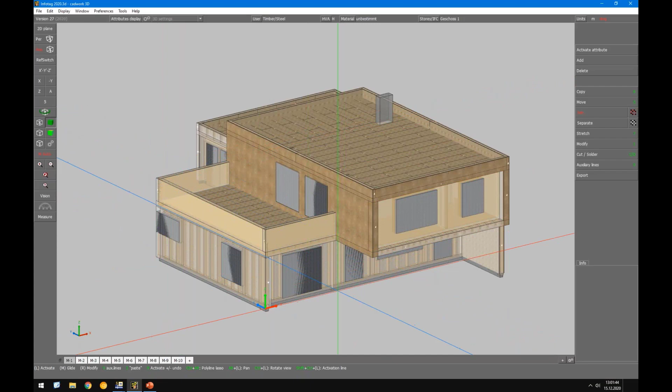Okay, let's not waste time. We start directly in cadwork, and we see the model there. Let's have a look underneath the rendering, and we will see how it was solved. So you can see here the CLT slab, and here on the left side, of this problem.

Okay, I got some issue with my monitor. So we have beams and dowel type connections. We get one component here in the vertical direction via this column, and one component goes in the upper chord to the next tension beam and downwards. So I'm interested only in...

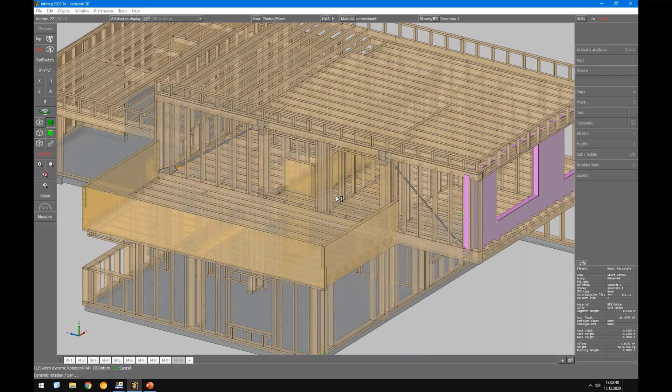I have some issues with my monitor. Wait a minute, please. Andreas, could you confirm, please, if you see still my screen? I can see your CADWorks screen. Yeah, okay, perfect. I switched over to the second monitor. There was an issue. Let's see if it works fine. I'm sorry.

The aim now is RFEM, and we can use it by exporting, for example, an IFC file, or we can export a DXF file. But there's one smarter solution.

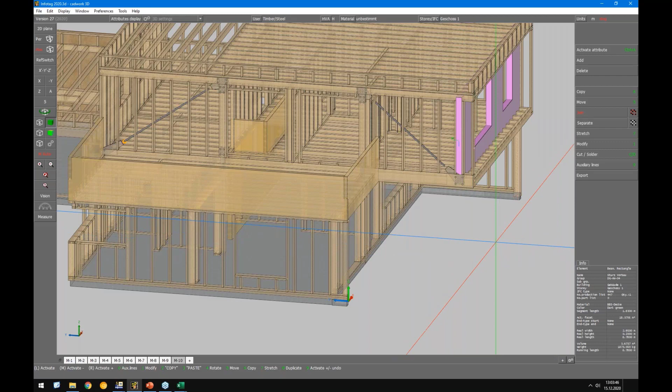In this case, I will have a look only at this element here, and I'm interested in the center lines actually, because this is a solid element, and of course I want to design it with a surface element and not with a solid element. So therefore we need the center lines.

Here in this case I can use a variant from CADWork, I was not able to rename it, but it's called center surface for CLT. Okay, so I use it and select the element. Then let's go to the wireframe mode, and you can see here the center line or the center surface. This is actually the one and only element I'm interested in.

So I have the possibility now to export it as a file. In this case, I use the ACIS export format. Wait a minute, I need to, of course, select all of them. All right, I save it. Let's export.

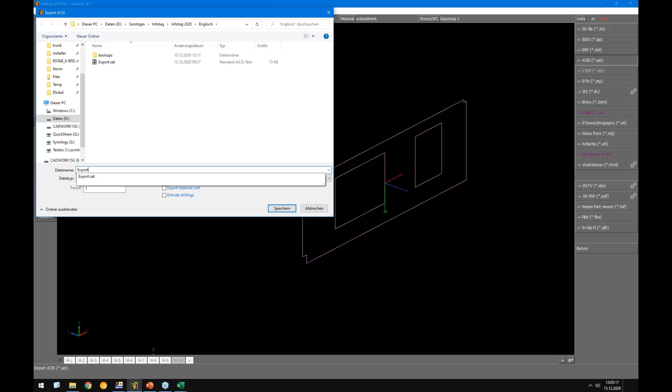And now I switch over to RFEM. Here I'm able to import this SAT file. I select the Eurocode 0 plus for the SLS combinations, EN1990 plus EN1995, and we leave the global Eurocode.

Of course, you're able to select any other national annexes. Okay, we want to create load combinations automatically. I select it and click OK.

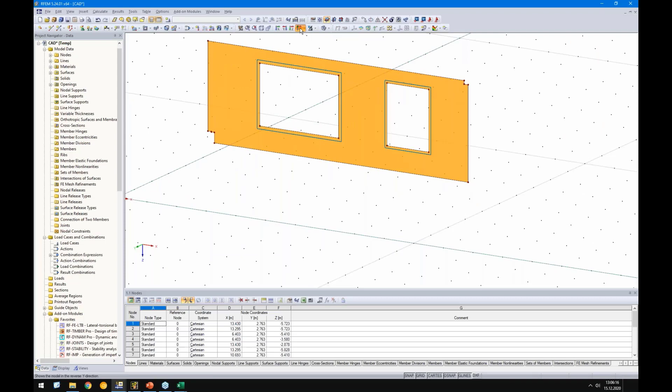All right, then let's see what we have here. So you see the wall was overtaken from CADWork with the openings, and there is a material assigned. Okay, it's a softwood material, but it's not important for now. We will come to this later.

We want to clean up the model a bit. So, for example, I want to ignore this notch here on the upper right side. I will move this node to get a sharp corner.

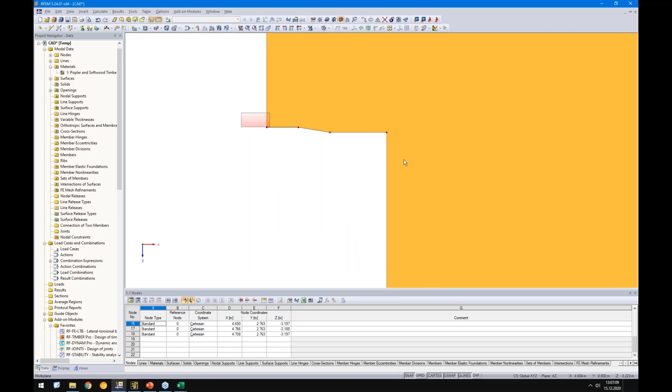Perfect, and I will do the same here. We have this tiny step, or this tiny jump, I want to neglect it, of course. So I grab the coordinate of this node and assign this coordinate to all other nodes. At the end, I will merge these nodes, and the same on the left side.

Right side, I mean. All right, so now we can start actually by adding the loads, supports, and so on. But before we do this, let's think about what needs to be checked and what is important. You see here the rendering of this surface, and it's clear when there should be a support and on the right side should be a support that the outer layers should be orientated in horizontal direction. That's one important thing, that we need to take care of the orthotropic direction.

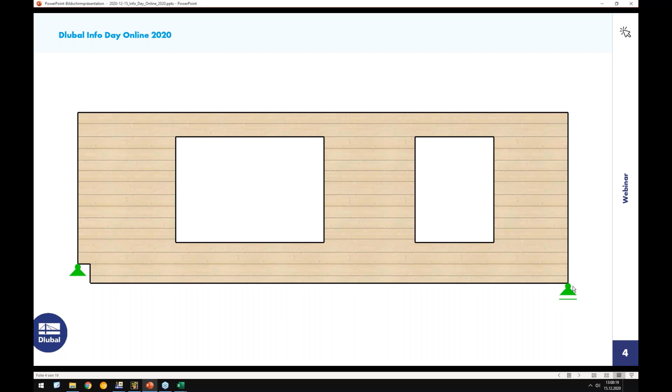So the outer layers should be horizontal, and every second intermediate layer should be orientated vertical. Okay, so the next thing is, of course, we need to take care about the supports. In this case, just for demonstration reasons, it's a nodal support. We will not use it afterwards in our design, but for the slide, it is okay.

Okay, we need to take care of the FE mesh. So what size should be used or is suitable? We talk about the stiffness of this CLT element, especially when we check this section here. This one here is a section through the wall. We see here we have the horizontal layers, and we have the transversal layers, which are orientated 90 degrees to the horizontal layers.

And you see it here, this white area. This should be the space between this board and this board, because we do not use any glue at the narrow sides of the boards. So this, of course, has influence on the stiffness, and we need to consider this correctly.

Okay, we have a tiny notch here on the bottom. Of course, it will not be controlling since this element is really high in ratio to this small notch. But you can imagine when you have a CLT element as a beam, and maybe you extend this line here, then you will see you have around 50% of the notch, and then it is much more controlling, and this fact needs to be checked. I'm just saying that you should consider it.

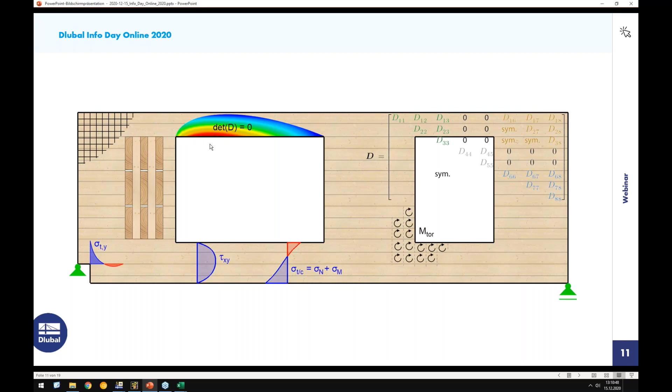Maybe buckling can occur. So in this case, we have roof beams and floor beams. But you can imagine when this acts as a one-span beam, the upper chord is under compression. So therefore, it can happen that the bottom side of this upper chord can buckle out somehow. This is something we will check.

And of course, the window must work also in the deformed shape, so it should not get any crack or get destroyed. So therefore, we need to check the deformations, especially the deformation inside here, and of course the global deformation. All right, that's so far for my presentation on the slide side. And now, let's start directly in RFEM.

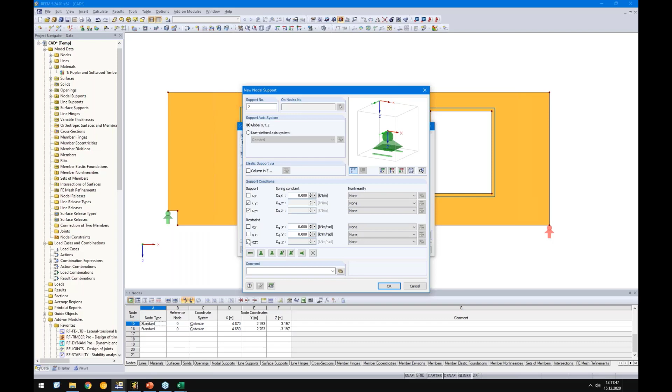So I will start really with nodal supports to see the effects. Okay, so I will support it on the left side. And of course, on the right side, I will use no degree of freedom in X direction. And of course, our wall is supported by the roof beams, the floor beams, and of course the walls. And in this case, I will directly add line supports.

So I support it only in Y direction, means out of plane. So here, here, here, and here. All right. So then, we can start with loading. So we create, first of all, load cases. Load case 1 should be self-weight, and we want to consider snow load. And of course, imposed load for the floor. Okay, you see here the load duration was assigned automatically, dependent on the action category.

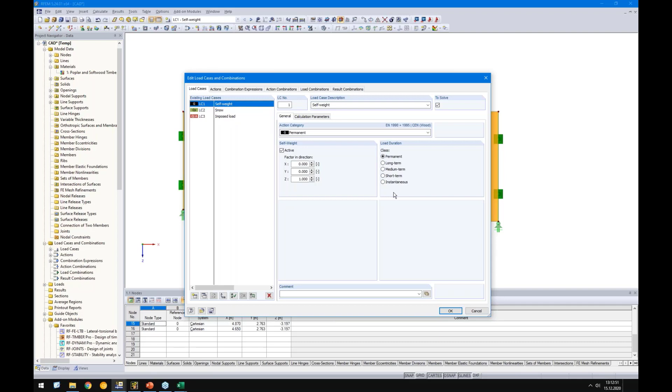And now we start to fill the load cases with loads. All right, so for the roof, we have a line load of 5 kilonewton per meter. And for the floor, it is the same, 5 kilonewton per meter. Then for the windows, of course, the window has a self-weight as well, which needs to be considered.

Which ways do we have to apply loads for openings? There is here under Tools, generate loads from area loads on openings. There is an option, but as you can see here, it distributes the load also to all boundary lines. And of course, this is maybe not the way I want to consider it now. I want to say that the whole window weight should act on these bottom lines here. So I use a normal line load here.

So when you consider we have a density of 25,000 newton per cubic meter, and the height of the window is 1.83, and let's say 3 layers with 5 millimeters is 0.015, that equals around 0.7 kilonewton per meter.

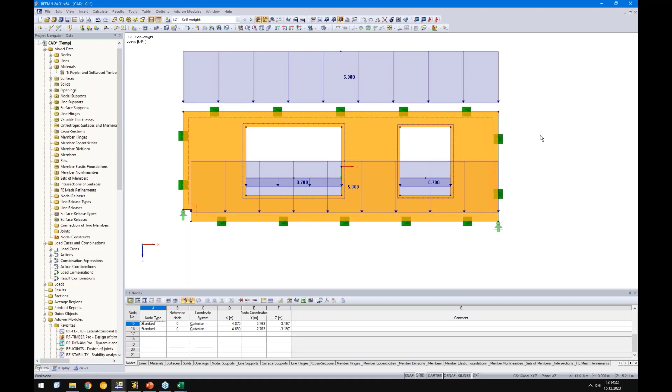Okay, and at the end, we need, of course, to consider the weight for the self weight of all components which will be fixed to the CLT element. And in this case, it acts on the whole surface, of course. So I use a surface load in this case. It should act in Z direction, and the load magnitude can be set here.

In this case, of course, I can calculate it manually and enter the value here, but you can imagine if you do this really often, you waste a lot of time. So better to use here our multi-layer composition. Inside here, I have prepared a few compositions for the wall structure. So in this case, I use this setting here. Let's have a look inside.

So there is an exterior plaster on the outside, wood fiber insulation. Then I have added the CLT. It should become 200 millimeter, and the density is 0 in this case because I consider the self weight of the CLT directly in my load case 1. So it's not necessary to add any value here, or you need to enter a value.

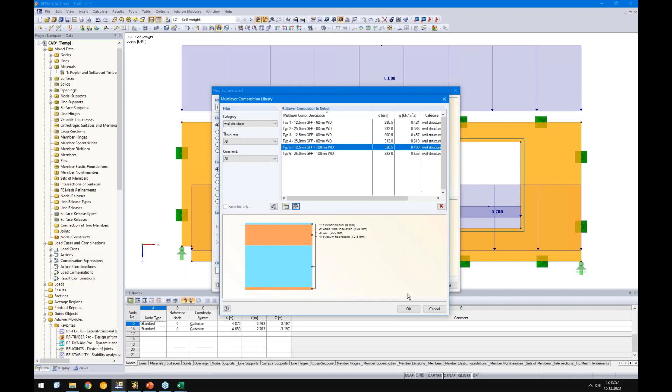0, I guess it's not allowed, but just enter a small value like 0.0001 to get it directly to the graphic here. Otherwise, you need to delete it, and then you don't have this proper drawing. All right, then let's overtake this value and click OK, and here we go.

So the next load case is snow load. So the snow load is 3.6 kilonewton per meter. And at the end, we have imposed load for the floor, and the floor beams are fixed on the bottom side of the bottom chord with 6.5 kilonewton per meter.

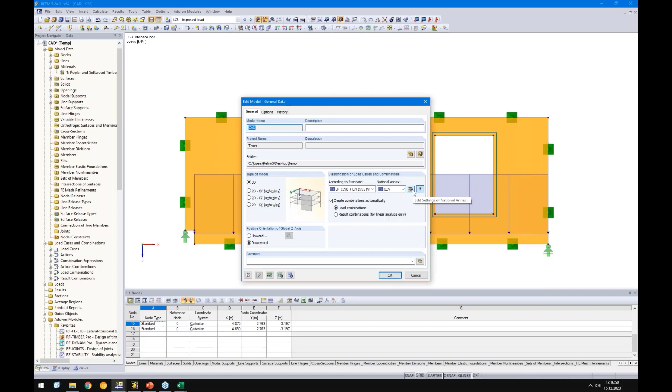All right, so far so good. We have finished loading, and we see directly the load combinations. Maybe you see here the 1.8. This considers the creeping effects. I forgot to switch this here, or to say you can switch the factor, the KDEF factor here at the properties of the national annex, and here on the bottom side you can switch, for example, to 0.6. So when you check it, you see the factor is considered in the load combinations for the quasi-permanent loading.

All right, so then actually we can start with the analysis, and before we do this, let's check our FE mesh. So I just create the FE mesh and see what is the result. And as you can see, okay, the FE mesh is absolutely bad and needs to be optimized. So you see here it's the default setting of 0.5 meters, what we use in the background. But what FE mesh size should I use in this case?

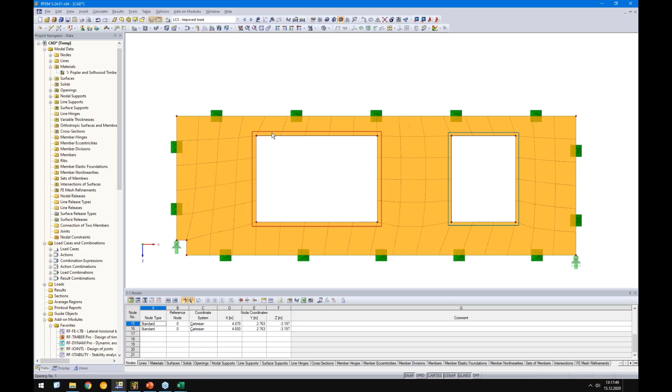So the weakest area is here, the upper chord, and I would say you should have at least 3 to 4 elements over the height here of the upper chord. And with the background that the producer does not put any glue on the narrow sides, and even if they put glue on the narrow sides, I do not recommend it as a rigid connection because of humidity effects and so on. So because of this, and we check this torsion design, what I mentioned in the presentation, the FE mesh size should be the same width as the board width.

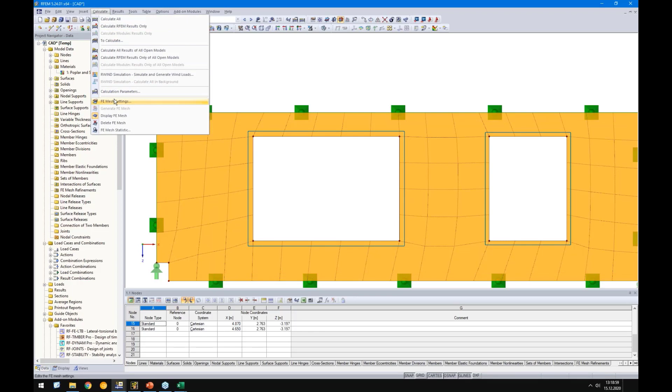So when you think about the ratio board width to board height around 4 to 1 or 3 to 1, then with the board thickness of 40 millimeters, what is used in this example, and use 3 to 1, we get 120 millimeter board width. So I will use here, let's start with 0.1 meters.

And regenerate FE mesh, and we will see, okay, we got 4 elements, we have these small triangle elements here and here. Yeah, for membrane forces, that's fine, but for bending, they could deliver some bad results. So maybe I will increase it a bit and see what's going on here. Yeah, 0.11. Yeah, looks good so far. So we use this mesh size for the analysis.

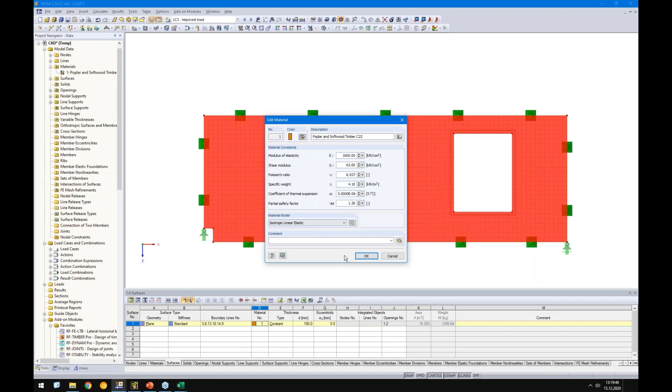Okay, then just try to run the analysis, and then you will see we get an error message because of Poisson ratio. And yeah, when we see this, this is just a poplar softwood timber with an isotropic linear material model. Of course, we can change it here to orthotropic elastic 2D, but in this case, that's something special with CLT, because for CLT, we have our add-on module called RF-LAMINATE.

Okay, and inside the RF-LAMINATE, we define the composition. And after we define the composition, before we run the analysis, the stiffness gets exported to RFEM, and then the internal forces are calculated based on the stiffness that we exported. Okay, I want to design surface number 1 according to Eurocode for CO1 through CO5.

So material characteristic, here we go with defining the composition. So we have to select the surface, it's surface 1, and here we can, for example, import compositions from different producers. Yeah, that's one way, and the common way actually, to not favor any producer, I created it manually. In this case, this is what you can do too.

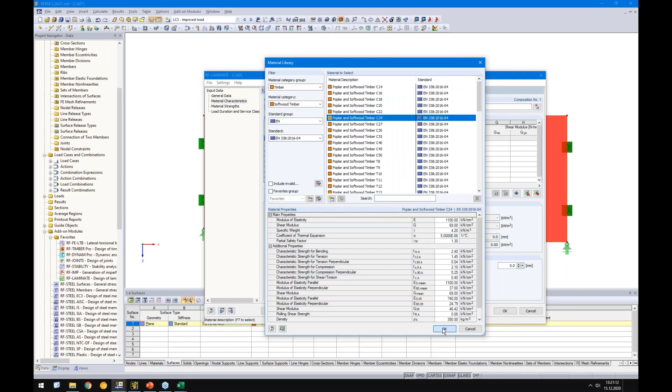So I'll load the material from our material library. So it's softwood, and I choose a C24 in this case, and you see here all settings are filled. And in this case, I select here cross-laminated timber. And let's see what's going on here. We have the thickness, 40 millimeter is fine in this example. The values for EX and EY are loaded, and for shear modulus and so on.

Here for the second layer, I hit the F8 button. It overtakes the entry from the first column. Okay, so in this case, the orthotropic direction is 0. So you see here this coordinate system. The red arrow is the x-axis, and the green one is the y-axis. So if I rotate the second layer, for example, you will see the red arrow goes downwards, and this is the transversal layer, so the second one. Okay, and the same for the fourth layer.

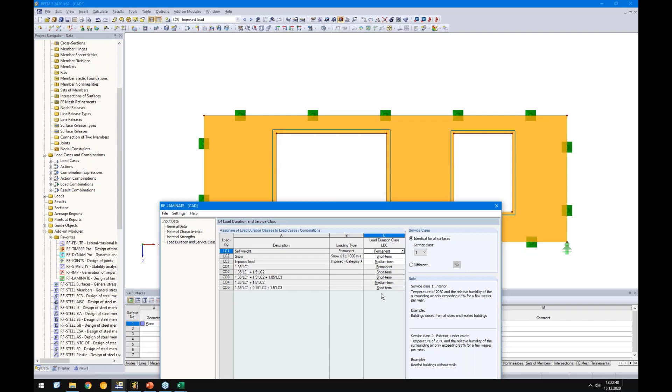Okay, then let's go to the next tab. It's the material strengths. And here we simply modify the shear strength a bit because we do not consider any k-crack for surface design, and therefore I will modify it a bit and set it for all layers. Okay, the last tab is about the load duration class, but it was assigned automatically to the load cases, and therefore we always use the shortest load duration as the code offers. Here are a few settings about the service class, but this is fine for us.

Okay, let's go back to the composition, and let's check the stiffness matrix. So we have the stiffness matrix elements for bending, for shear, and for membrane. And in this case, I do not consider any wind, since the wind was really weak in this example, and it is not controlling. It's much easier in this case to consider and envelope the results. So therefore, in our case, only the stiffness matrix elements for membrane, meaning D66 through D88, are necessary.

Okay, but the only problem we have now, we did not load it from the producer library. Therefore, we have a bit too much shear stiffness inside the plane, because how should the program know about the glue on the narrow sides? And this is what I want to show you about this issue. Okay.

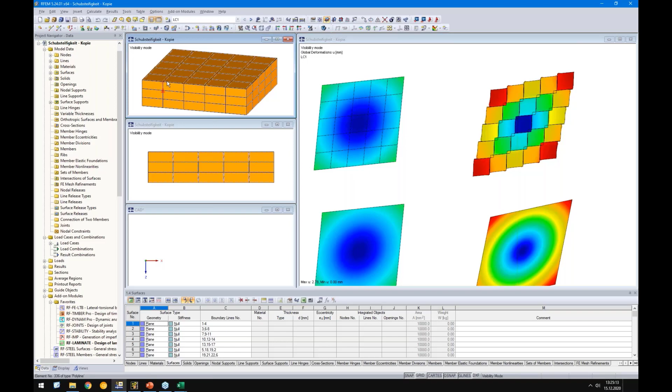All right, so here I have prepared a small example, and these are solid elements. In the upper one, I have glue on the narrow side, so it means there is a rigid connection between the solids. And on the bottom side, you see I have modeled a small gap in between each board from this direction, and also in the other direction here on the upper side. And here you see the results. So this is the result from the solid, and this is the result from the surface and RF-LAMINATE. You see the result is the same.

And of course, if there is no glue on the narrow sides, the deformation gets bigger, and this effect needs to be considered also here in RF-LAMINATE. And what you need to do is consider the ratio from this solid element to this surface or this solid element. And then you get a factor and you know how to reduce the stiffness. Of course, this is really time consuming, and nobody wants to do this.

Fortunately, there is an approach already, and it's based in the Austrian National Annex. So here you see this Excel sheet. You can download it afterwards on our homepage. You see here a small table, and you need to enter just the thickness of the slab, the amount of layers and the board width, and you get a reduction factor of 0.59.

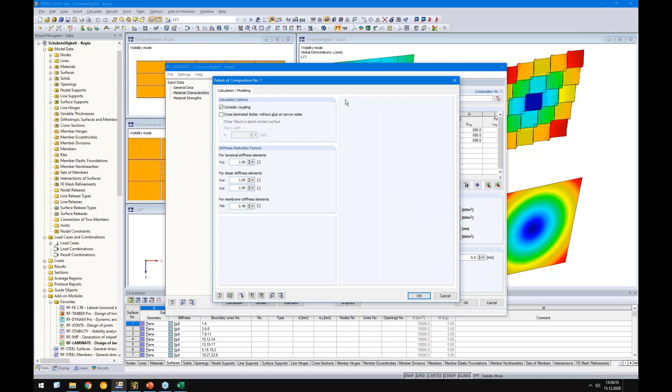And when you enter this value here in the details of the composition, as you can see here, you get exactly the same deformation as the solid elements have. So this needs to be done in case the producer does not provide us any values, but normally they do, and therefore you don't have to waste time on this. All right, so let's go back.

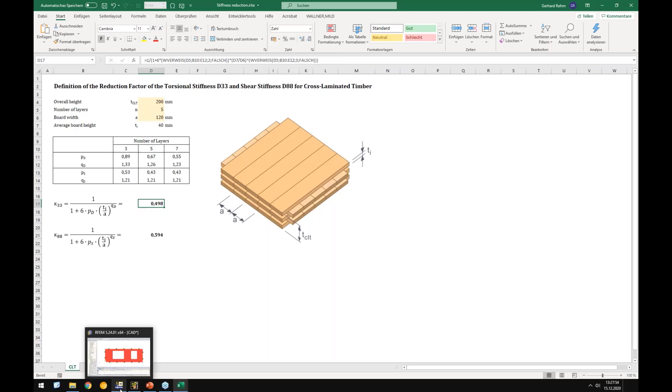And for our example, we need to figure out these factors. So I'll open the Excel sheet. So in this case, we had 200 millimeters, 5 layers, and 120 millimeter board width. So we have a reduction factor for the torsional stiffness, it's 0.5, and for the in-plane shear stiffness of 0.6. And these values we overtake now. So it's 0.5 and 0.6.

I use it also for the torsional element, since we do an eigenvalue analysis afterwards, and there the torsional stiffness is important too. Okay, here I say I have no glue at the narrow sides. You see there is a modulus in Y direction considered. We will check what happens afterwards, and we have 120 millimeter board width. That's because of this torsion design.

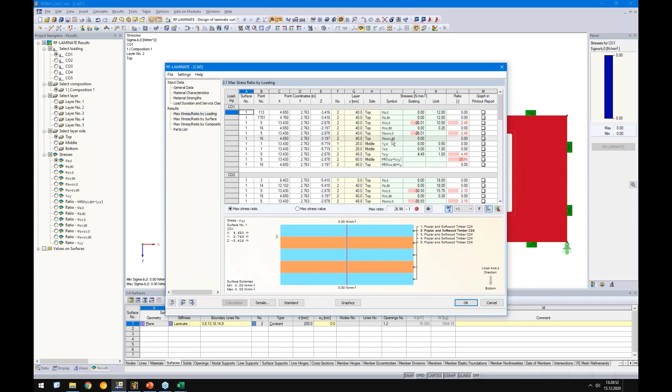As you can see here now, the modulus in Y direction of each layer, so not of the whole composition, only of each layer, is set to 0. All right, and then let's start the analysis. Okay, so this is the result. The first time really confusing, but let's see what we can do.

So in this example, in this tab here, you can select which designs you want to see. And in this case, we have only membrane forces, so the stresses are constant over the width, and therefore I'm interested only in the results from the middle layers. And of course, I'm only interested in our normal stress and in our shear stress in plane. That's XY, that refers to the local axis system. And afterwards we activate the torsion design, but for now it should be fine.

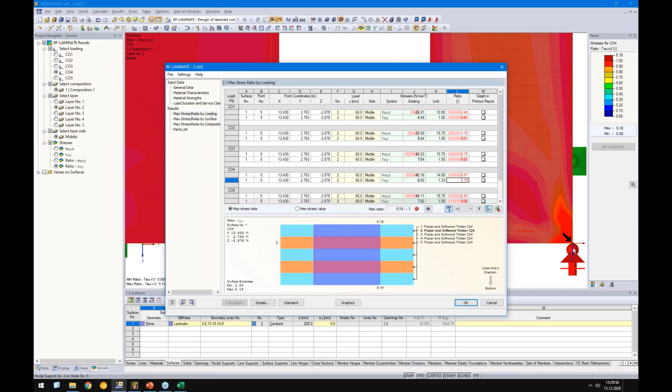Okay, then we come down to a ratio of 5 point something. Okay, let's see where it happens. You see this black arrow here. Of course, it's exactly at the location where the singularity is and where the nodal support is. And of course, everyone who dealt already with FEM knows that's a typical singularity, and we cannot evaluate these results.

Okay, so what can we do in this case? Of course, we can do the same as we do for loads. We distribute it to line loads or area loads. So in this case, I will distribute it to a line load. No, wait a minute, it was the start. Support width is here 22 centimeters.

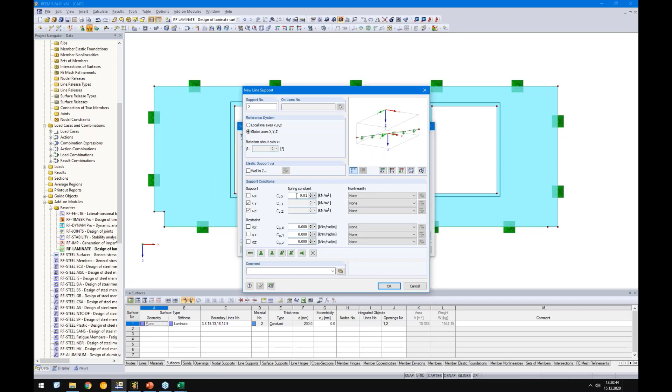Okay, so let's start here with the line support, and of course we should release it in X direction, and I create only one support, and it should be, of course, supported in X direction. Therefore, I enter a tiny spring here in X direction. Otherwise, the structure would move to infinity. All right, then let's go back to RF-LAMINATE again and check what happens.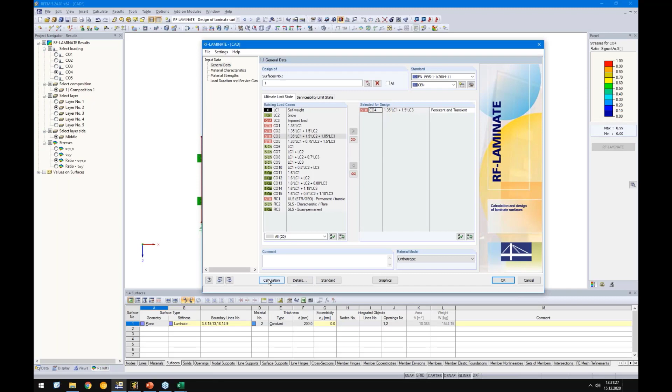So we had a ratio of 5 point something, and because of the line supports, we came down to 0.99. Of course, when we check the maximum ratio again, it comes from CO4. Maybe the easiest way, I will remove all other COs for future analysis, because CO4 in this case is design giving, and I will check only CO4. It saves me a bit of time.

Okay, so we have 0.99, and when we check it, it's not in the corner, but it's here. So we have no stiffness here on this line, but then we have a really stiff or rigid support, and of course we get another singularity here. Of course, in case we use this approach, we have to consider, okay, what about our support reactions?

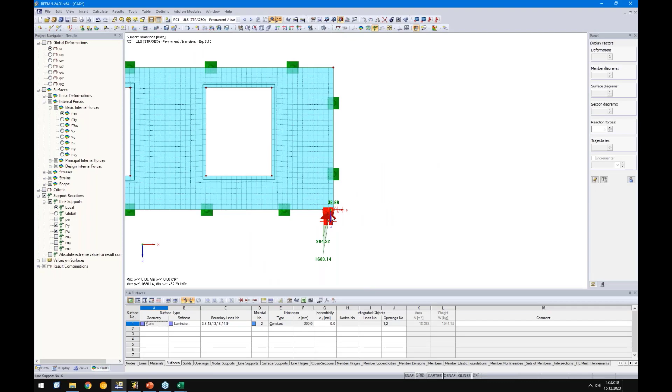So I will check our support reactions, and we can see here, maybe we need to refine the mesh a bit, but you can see it here, also tension forces are covered by the support. Of course, this should not happen in our example or in general in timber. Therefore, I add here a nonlinearity, which says, okay, please fail if there is a negative support force. So in case of tension, the supports should fail.

Okay, then let's check it again, just to avoid any restraint here in this corner. Okay, then we are fine, perfect. Okay, but let's go back to Cadwork, and let's see.

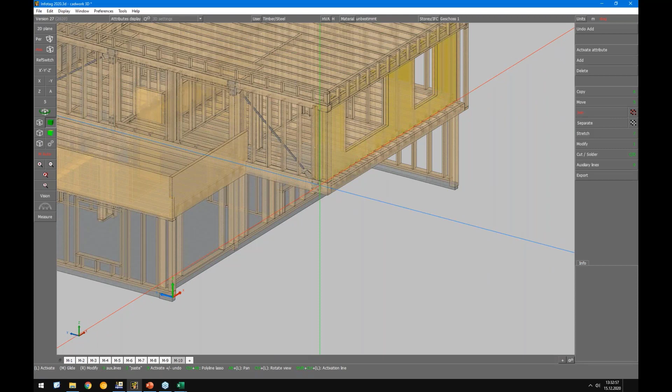Let's see here. The support condition here on the left side is still considered as a rigid support. Maybe that's true here for the right side, but of course not for this side. How can we represent this support in our 2D analysis?

I have prepared a scene in Cadwork, so these are my elements of interest. In this case, I can simply say here, please export a structural system. This is what I want to do. Okay, there's something about the connection. I want to save it, let's say, on the desktop, and I want to save this submodel DSTV file on my desktop.

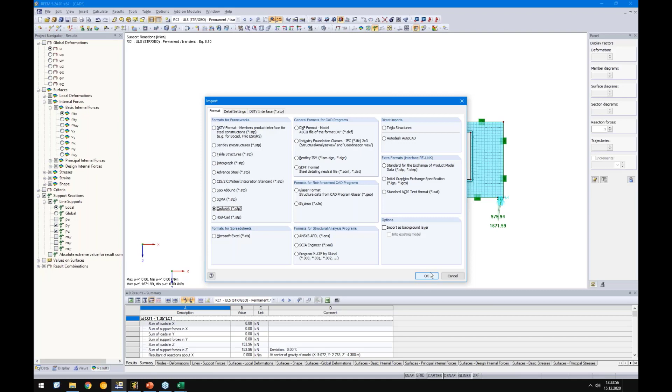And now I can import it here on the left side, Cadwork STP file. It's an STP file based on this interface for steel constructions, but it works also for timber. Okay, so, here we go. We don't need any load combinations, and we can simply import this file. Okay, looks good so far.

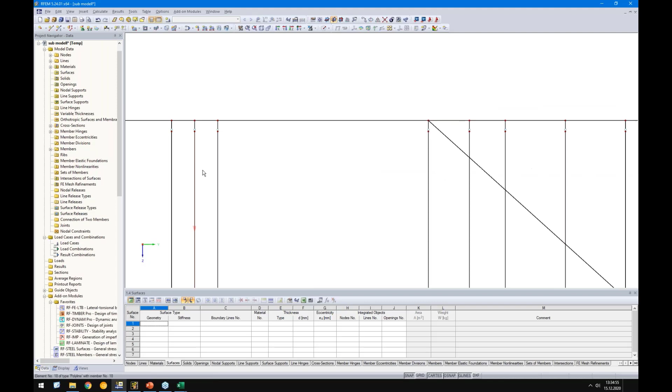So we have the member elements included in RFEM, and let's see the wireframe model. You see, there are still a few issues. We need to fix this, or we can fix it quickly here. You see here, members are not connected, or members are too long, and so on. That's because of the half width of this beam element. Okay, so this one we will fix via drag and drop directly, and the same on the right side, and here on the left side.

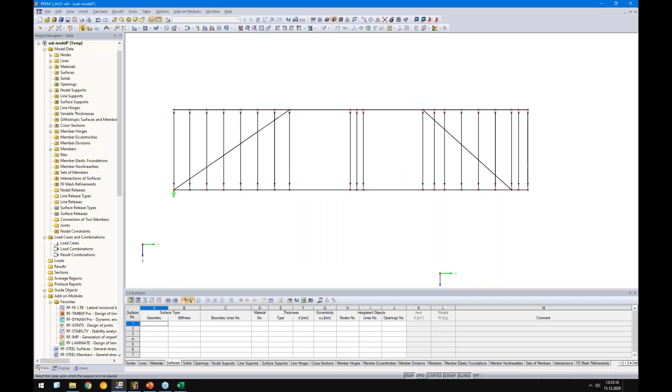Okay, then we quickly support it. We need to support it in Y direction, otherwise the beam would rotate around its own axis. And there is another support underneath this column. So I will add another one, which is sliding in Y direction, here and here. And the top chord, of course, must be supported, otherwise it will fall down or the beam will rotate around its own axis.

Okay, so in this case, I need to restrain it around the Y-axis, for example, with a spring. And here I want to support it in X direction. For simplification, I just select it for all nodes, but I'm only interested in the vertical deformation. And you see here, the vertical deformation is sliding, which is fine.

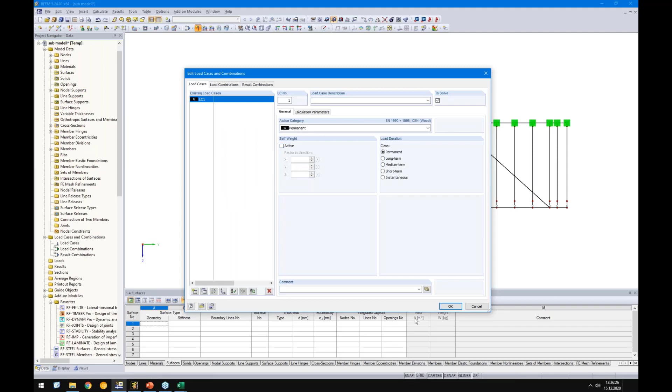Okay, and what is my aim now? Actually, the aim is I want to add a unit load here. Based on this unit load, I get a deformation, and based on this deformation, I can calculate my equivalent spring. So I create a unit load of 1 kilonewton. I deactivate the self-weight in this case. 1 kilonewton. And let's see the deformation in Z direction.

Okay, I forgot to mention, here we have some hinges and here some beams. Maybe I'll explain it in a better way. In this case, I directly replace these beams by truss elements, with a hinge connection on member start and member end. And here these coupling members, which consider the eccentricity. The hinges come directly from Cadwork, but I don't want to consider them. Therefore, I will delete them.

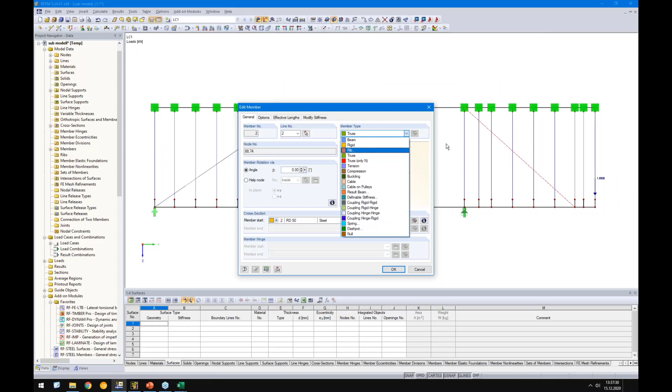Okay. And of course, you can discuss if this is a truss beam or maybe it's better to use a tension beam. But in this example, we get only tension forces, therefore it does not matter. Okay, we get a deformation of 0.147 millimeter. And of course, we can use the spring now.

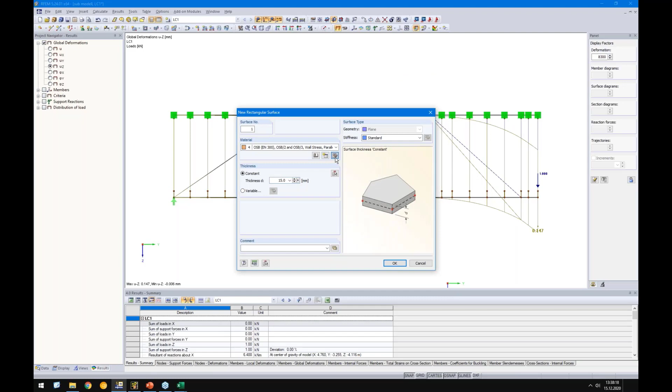But of course, we know there is an OSB sheet on these beam elements. So we can add this OSB sheet too, to have more stiffness. This is what I will do now. I will create a new surface. So we have timber, OSB, and here we select wall stress. It should be a 15 millimeter OSB 3 sheet. And in this case, of course, we cannot use an isotropic linear elastic material model. We will switch over to orthotropic elastic, where we have different E modulus in different directions.

Okay. So here we go, on the left side and on the right side. Okay, then let's run the analysis. We get an error. This error is because of these tension beams, or these truss beams. And you see here, there is no node, there's no connection to the beam, which is fine. But of course, there should be no connection to the surface as well.

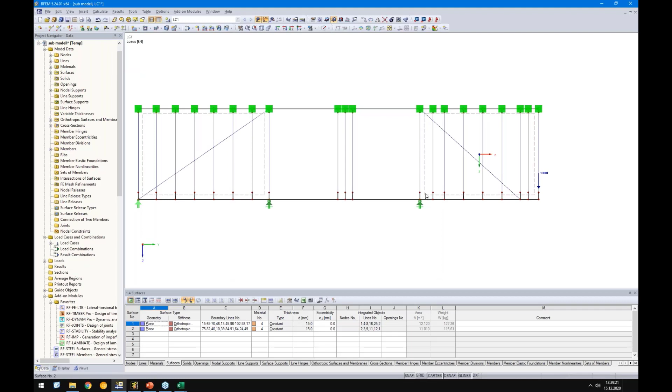And in this case, the easiest way is to say to the surface, please do not integrate this line, and then the member is not integrated automatically too. I will do the same on the right side.

Okay, and in this example, of course, the OSB sheet is connected rigidly to the beam elements. Of course, that's not the truth, because each timber element is connected to other timber elements with an elastic spring, for example, and this is what I want to consider too. So for this case, I will select only 2 surfaces and all integrated objects.

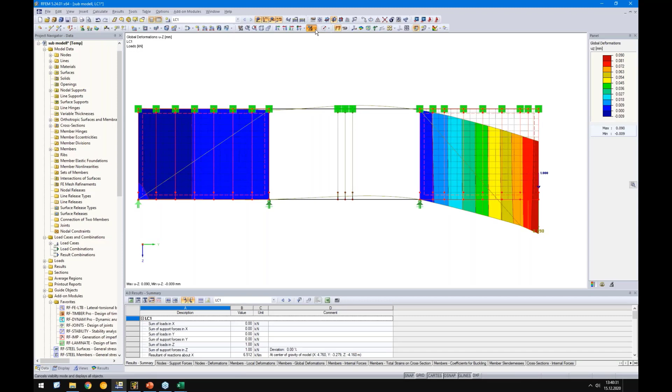Okay, so now I want to release the surface from the beam elements, and this I can do with line releases, so graphically, here I define a spring. So I want to say the axis system should be according to the z-axis coordinate system. So in this case, I can consider x and y degree of freedom.

So the spring constant, of course, depends on the fastener, in this case some staples. So the Kser for one staple is around 500 Newton per millimeter, and when you use 10 staples per meter, you get 5,000. So 500 by 10 staples per meter.

The same here, okay, in both directions, and here I release surface number 1. Perfect. I select all these lines, and I do the same on the right side, so this is surface number 2.

And now we should get a deformation which is between the 0.09 and 0.14. Of course, in this case it's 0.10.

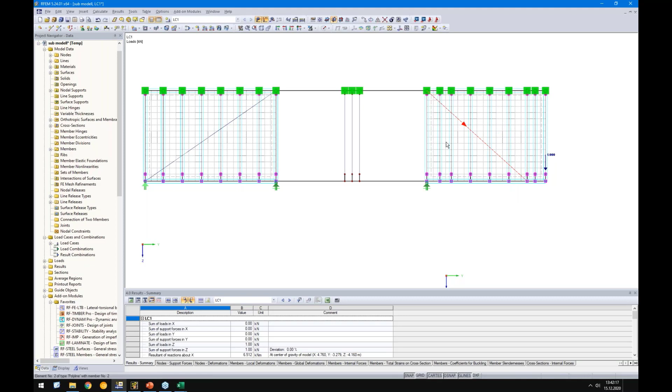Finally we will add another semi-rigid connection, of course, because of this tension beam connection with these dowel type fasteners. So in this case, I select these beams and I say, okay, please use a beam element, and I want to define some member end hinges.

Okay, so I have prepared an Excel sheet where we can simply calculate this spring. So for example, this is the result for dowels from Eurocode 5, table 7.1. So for one dowel type fastener with 12 millimeters, we get a spring of around 4,500 kilonewton per meter, and this value can be multiplied by 2 because of steel wood connection, and we have 2 shear planes and 25 fasteners. So we get a spring of 450,000 kilonewton per meter, which is really rigid.

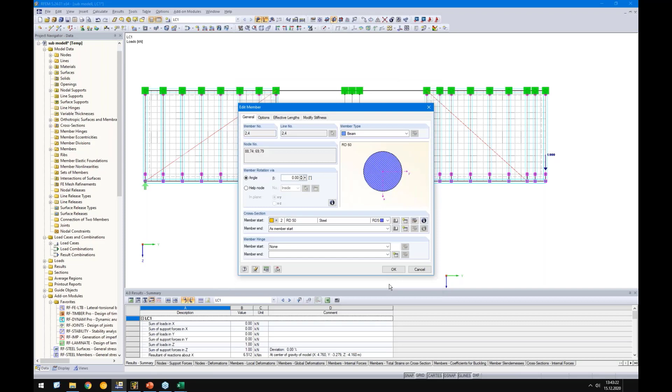So in this case, it should be in Y and Z direction, so 450,000. And here we can consider just a tiny spring to keep it stable, and of course on both sides.

So we had 0.10 millimeter, and now it should become a bit higher, a bit much more deformation. So 0.32 millimeters. Let's get back to our Excel file.

And here, I divided the 1 kilonewton by the 13.2 millimeters, and I get this equivalent spring for the whole support. And here I distribute this spring along the line length. It's 22 centimeters, and I get this spring of 35,000 kilonewton per square meter.

Okay, and this spring I will enter in my main model. All right, I will change it here. So in Z direction, I want to consider this value.

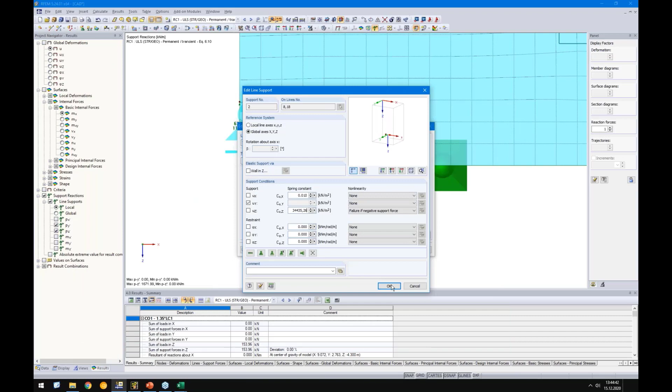Perfect. Of course, here on the right side, it's different because here we have a column underneath with 22 by 22 centimeters, and it's, I guess, 3 meters high.

So in this case, we can calculate an equivalent spring too, and the program makes it easy. We can use this function wall in Z direction. So the width was 220 millimeters, the height was 3 meters. Material, in this case timber, has different modulus in different directions. Therefore, until now, the timber material is not supported by this function, so we simply use a concrete material, a lightweight concrete in this example, which has the same modulus as the timber has.

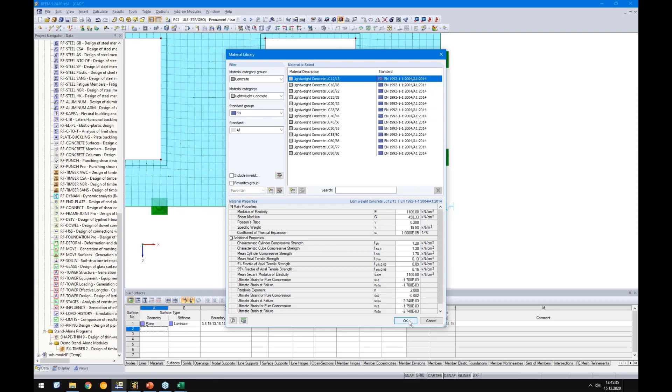Okay, and it should be hinged, and I get here my equivalent spring. So in this case, it will not work because I don't want to consider the spring in X direction. Therefore, I will deactivate it and replace it again by 0.01.

Okay, that's it so far. And let's add maybe here this nonlinearity. Okay, and let's get back to the RF-LAMINATE module, and finally let's check the results.

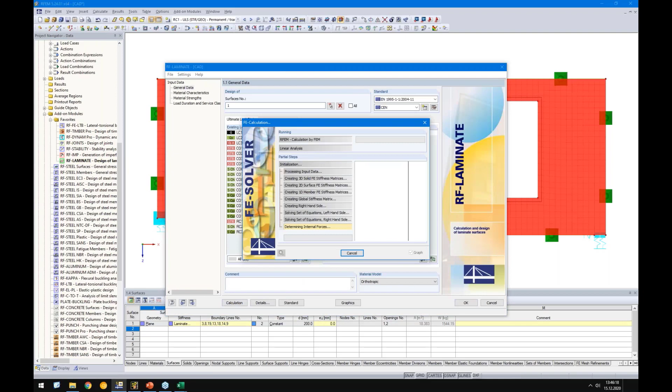Okay, we came down to 0.96, but when we check it, it's not here on the bottom right corner, it's here in the windows, because of course we have some singularity here because of the corners here. Okay, but so far it's good.

So now we need to evaluate the results. For surface design, we need to move away from thinking about member design where we have a clear ratio. Because of the singularity, I recommend you follow this procedure. It makes no sense to check here if the smiley is red or green - you need to evaluate it at once.

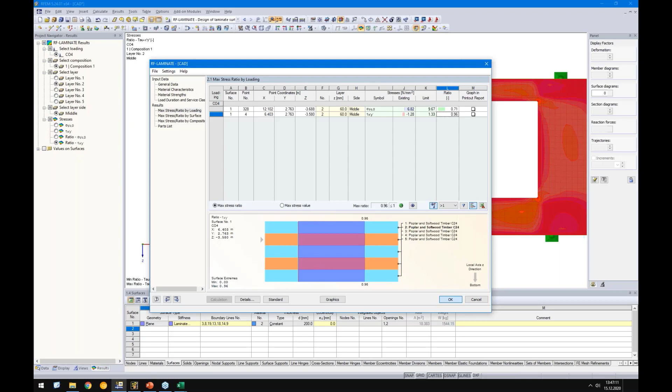In this case, let's check about... let's start here. So we have, for example, layer number 1. Of course, we have only one layer side for the results because the results are constant - over the width. We have no plate stress and no load out of plane. So therefore it makes it easy.

Okay, let's check the stresses in this case. So this is the typical normal stress, where there is tension and here compression on this chord, and the same on the upper chord. We can see directly the ratio - the ratio here is around 0.6. So even if there are singularities, I would say for this ratio, this is okay, this is fine.

For shear, let's check the shear force or the shear stress. Of course the shear stress is really high here in this region and this region, which makes sense because there is less height than here or here. Let's check the ratio - we know the ratio is really close to 1, but the question is only in which areas.

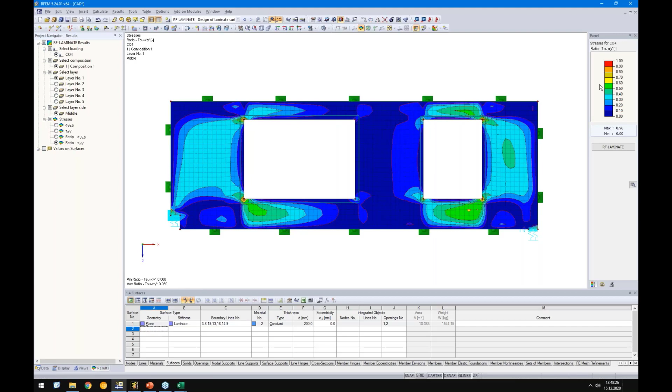This is exactly what you should consider - which areas are affected. In this case, I recommend showing all ratios which are higher than 70%. Then you will see there is actually nearly none, but only here, because that's a singularity - the stresses become really large within one FE element. So here, if we exaggerate the 70% ratio, only these corners have a higher ratio, but we cannot evaluate it.

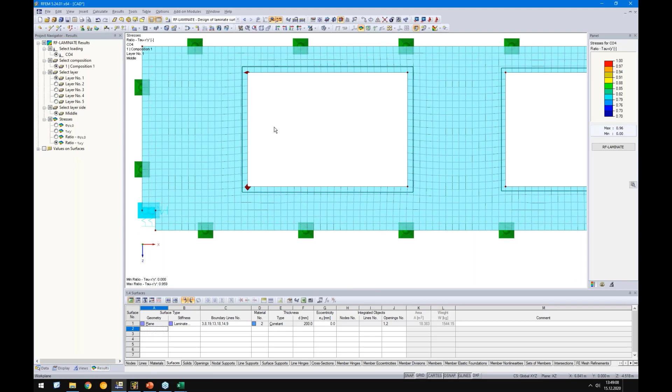There are a few possibilities for how you can get rid of the singularities. I don't want to show it in detail now because we have shown this so often in our webinars. The easiest and best way is to use average regions. So you can create a new average region for surface 1.

And the center, for example, should be here, and should be a circle with 0.3 meters. When I click OK, let's check the results for CO4. In this case, I want to check the shear, for example. You can see here, when I deactivate the average region, this is the result which comes from there.

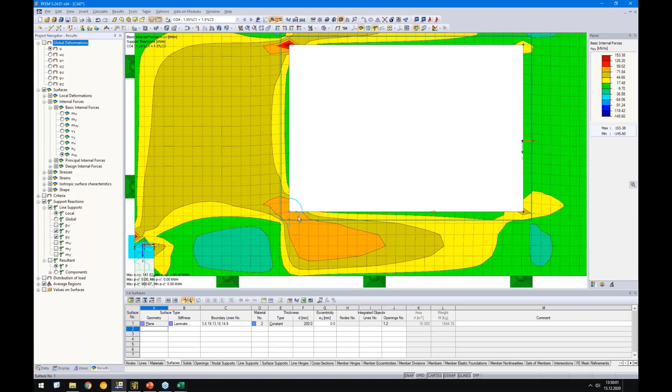And when I activate the average region, you see the result was distributed along the length, height, or width of this average region. Of course, it's better to add a mesh refinement to get a finer mesh around these nodes. This is one option, but I don't want to get into detail for this example, because there is so much information on our website about this, and you'll find it in our other webinars on how we deal with average regions.

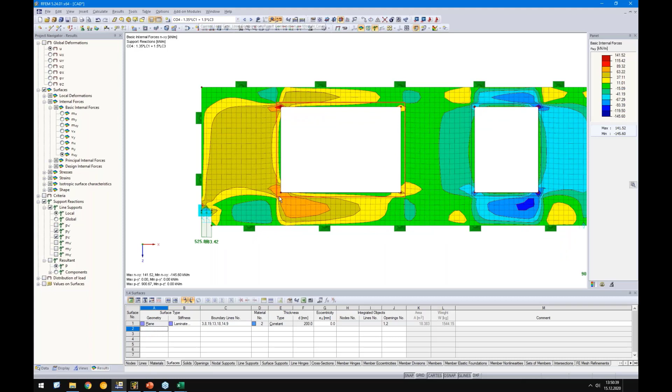Okay, so then let's check this notch result here, and in this example I will create a simple section. The section should start here and go to 5.5 meters for surface number 1, in let's say the minus Z direction. To increase this section... no, wait a minute. Of course the section must go out of the plane, and then you see exactly here this stress.

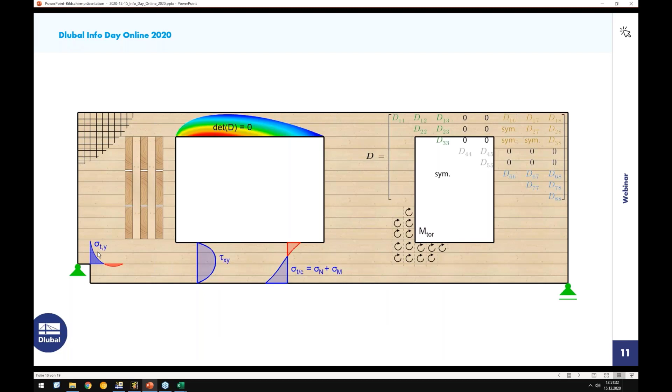Okay, maybe better - in this case I used NY. So maybe it's better to use a finer FE mesh here, and then you get this typical transversal tension curve, which is shown here. I don't want to go into detail for this example because RF-LAMINATE evaluates this automatically, since we have our stresses.

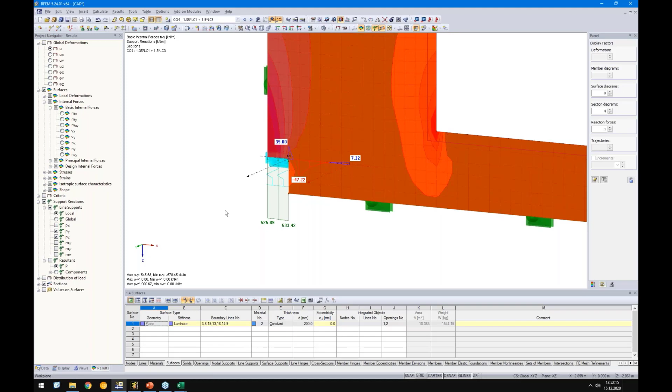So when we check - sorry, I need to switch - when we check our normal force inside here, in the Y direction, as you can see here, it goes perpendicular to the horizontal layers. So this can be evaluated manually with this section, for example, or you can simply let the RF-LAMINATE module do the job, which does this automatically.

So then let's go back to the RF-LAMINATE module again, run the analysis again, and see the results again. This is actually really simple because we have only membrane forces. You can imagine if you have plate bending and normal forces and so on, a lot more design checks must be done, but in this case it's really easy.

So we have only our normal stress, our shear stress, and the accordingly ratio. Of course, I did not activate it - we need to activate this torsion design because of the missing glue on the narrow side. So this is what I want to do now. I will activate it, and here you see the design is not fulfilled, but please think about the ratio and where the ratio is.

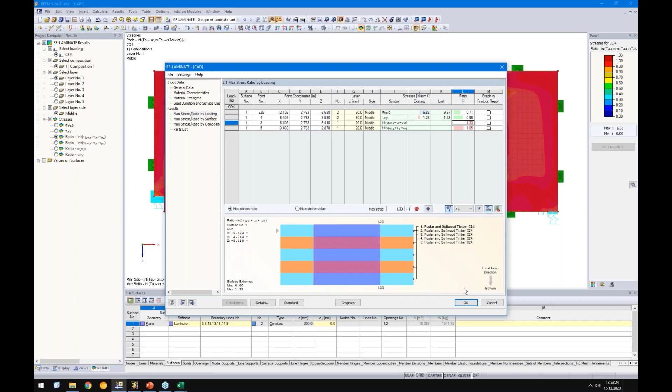So we go to OK and see, maximum is 1.33, but as you can see, it's only at these spots. For this example, I would not define any average regions, because you can argue: when I check everything bigger than 1, so a ratio 100% to 133%, the whole surface is fine, only this one is not, and vice versa too.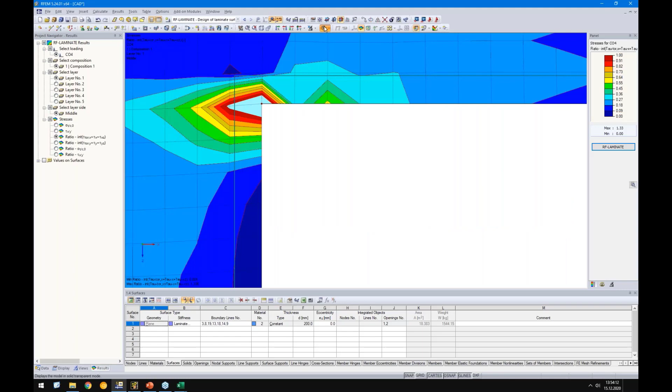So if you are interested in everything that is fine, just go from 0 to 1, for example, and then you see the real ratio. Only in these elements you will not see any ratio, but of course you are not interested in those.

Unfortunately, we have no possibility in timber to distribute stresses to fix the singularities, or to distribute stresses with a plastic analysis, a nonlinear plastic analysis, since we use only linear elastic material behavior in timber, which is actually common. So there is no real way to check it for timber.

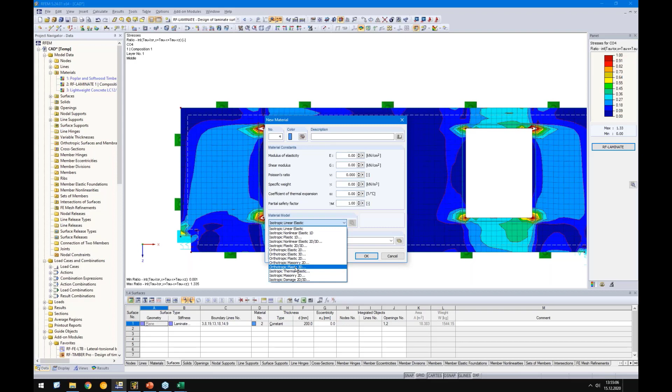We have a solid material model called orthotropic plastic 3D, but this is not the desired design for this simple wall element, because it is much more involved. You need to define the strengths, the limits, and model the slab or wall element as a solid element. Each layer needs to be modeled separately, and you need to consider modeling the gap due to glue or no glue on narrow sides. This is not a practical way to do this.

Okay, then let's check. SLS is missing. But yeah, stability - so let's check about the stability of this wall.

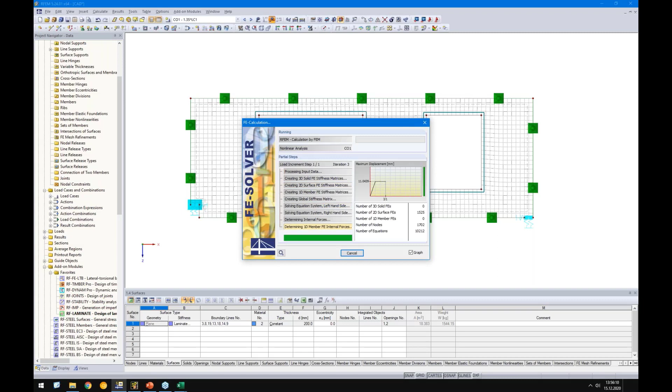So I keep it simple. In this case, I start my add-on module called RF-Stability, and let's check where we have the highest normal forces. So we go here to NX, and let's see. Okay, we have around 580 here from CO1.

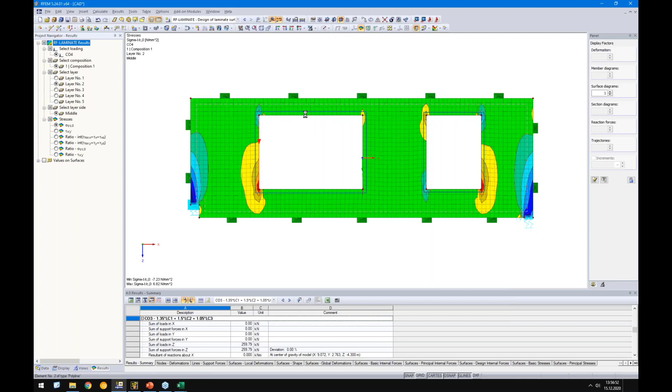CO2 is 806, and CO3 is 996. I guess the other ones will not get any higher. So let's use CO3 with the highest normal force in this area, because I believe that the first eigenshape will happen here in this area, which is clear actually.

Okay, let's go back to our stability module and select CO3 and simply run the analysis. The only information I get out is the eigenshape, which is okay. So this is the first eigenshape.

So it can happen that this bottom chord will buckle out somehow, but of course we need to check the critical load factor. And here you see the critical load factor is nearly 30. That means you need to increase the load by factor 30 to get this failing of the bottom chord.

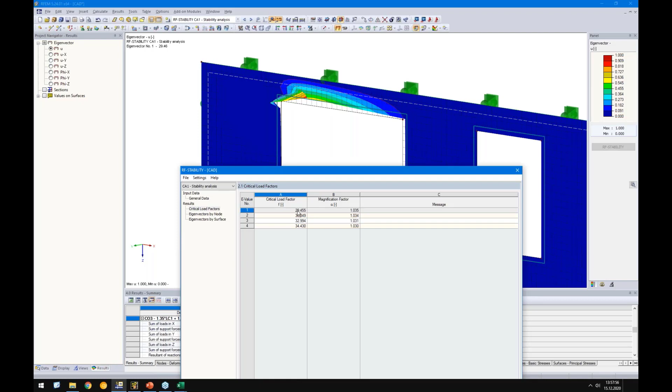So you need to analyze stability, because this is on the unsafe side, since no imperfections are considered and so on. But we have a good feeling with this factor, because it is common to use a factor from 1 to 10. We need to check stability, and everything bigger than 10 we can think about neglecting, and in this case we definitely can neglect it.

So, how we deal with stability design for surface elements, I have shown this on the website for cross-laminated timber. Simply go to dlubal.com, switch to English, then go to support and learning, and here knowledge base.

I'm not sure if I find the correct keyword. Maybe better to search my name instead. Okay, seems there's some issue with the website. I cannot search for it, but it doesn't matter.

Okay, you will find this information. If not, please contact us, and I will send you the links afterwards. Okay, then at the end - there's not much more time anymore, but I will show you in a few minutes, so I will need 5 to 10 minutes more. I will show you about the serviceability stuff I mentioned in the presentation.

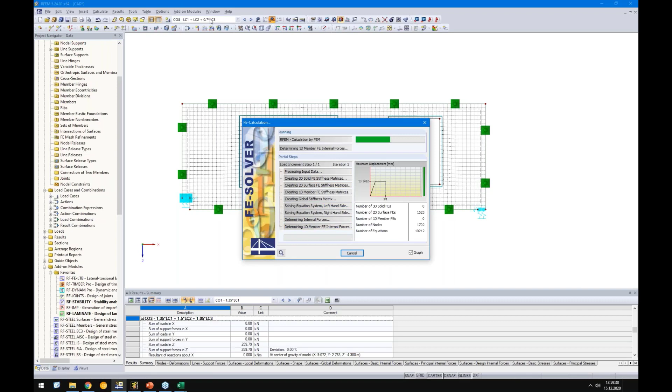Okay, so let's check. In this case, let's focus on CO8 only. CO8 is the characteristic deformation with snow load, or maybe the other one is more important, because the imposed load was higher than the snow load. Okay, so let's check the deformation of this element.

All right. Okay, so do not wonder that deformation is displayed with factor 67. Therefore it's clear that the deformation is higher here on the left side, because this support is weaker than the right support. But as you can see here, this window is already deformed. And of course, when you think about a rectangular window, this rectangular window must fit into the hole after it's deformed. And of course, it should not get any load.

And how we can deal with this, I will show you now. So in this case, of course, you can, for example, export this deformed shape to AutoCAD, to a CAD file, a DXF file, and there you can insert this window and check if it still fits inside. But there's a much smarter way. In this case, I will add some rectangular surfaces. I will use a rigid surface.

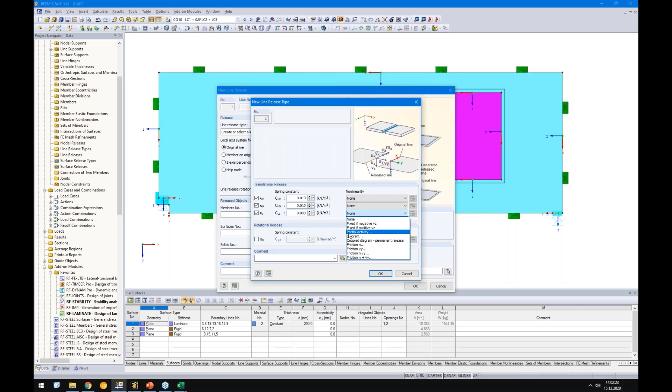And in Z direction, I select here the nonlinearity partial activity. And inside here, I can define some slippage or displacement, in this case, let's say 1 centimeter. Of course, you can do it differently for different directions, so in plus and minus. For my example, it's fine with both directions.

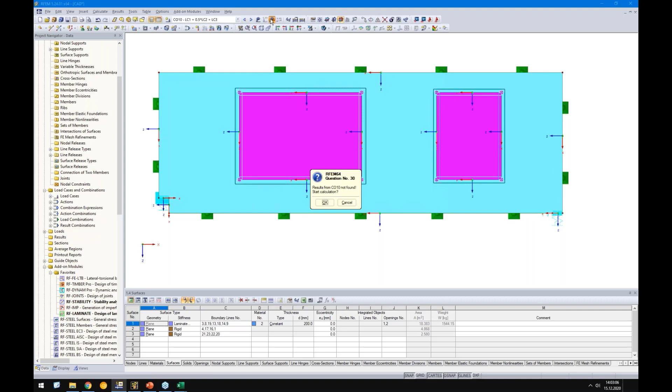All right. So I will release surface, I guess it's number 2. And I want to release these lines. And I want to release surface 3 for this one here. Okay, and now let's run the analysis again. Okay, so I didn't remember the deformation before, but that's actually not the aim.

Let's check the deformation. So first, you might see it could be a bit confusing, because the window is displayed inside the CLT wall, but that's clear. We have modeled the window, the rigid surface, directly to this wall element. So we do not model the gap, we consider it with a line release. And therefore, the distance now between this node and this node must be smaller than 1 centimeter.

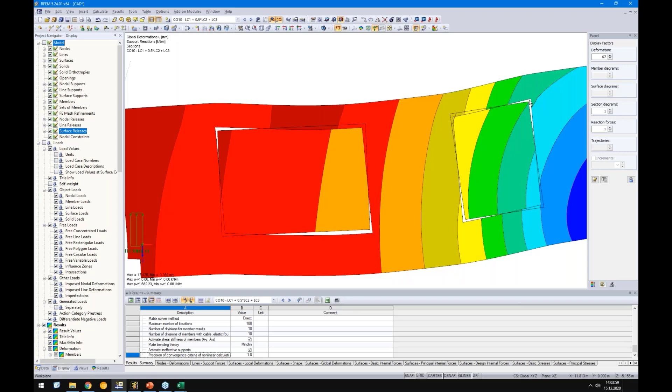You can imagine it's hard to evaluate, especially on bigger models, or when you need to check it with some lines or diagrams. You can say, okay, please show me the result diagram on this line or section, what is the deformation, and compare it and so on. This is actually not a good idea. Much smarter is to use our results called releases. Here I can activate the releases and I get the release forces for line releases.

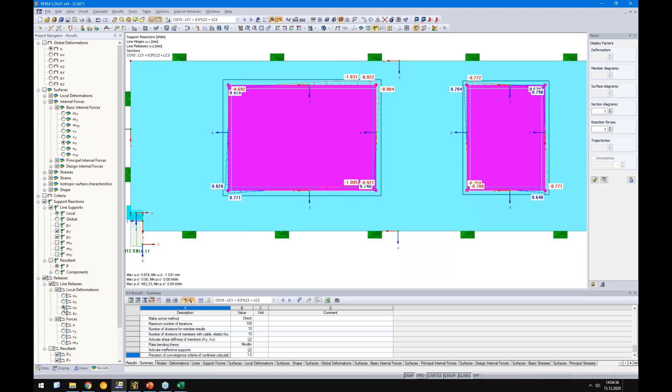Another option is to check the forces. So we check vz, and as you can see here, vz is 0. And of course, if there were some forces going into the window, into the rigid surface, we would see a force here, and we would see a distribution of the force here. So therefore, it is fine. And this is the way we can check this stuff here.

It was clear that the deformation is not getting so big, but on bigger elements this could be an issue and could be solved. So because of this, you have to think about the gap between the window and the surface, the real window.